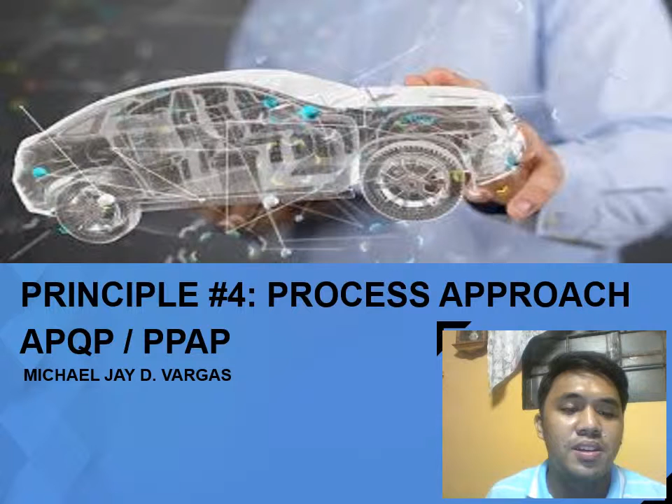Hi, I'm Michael Jay Vargas, and I will discuss with you principle number 4 for process approach, which is APQP and the PPAP. So, giving you the APQP background, a major objective of APQP is to provide a vehicle for suppliers and customers to work together when developing a new product.

APQP was introduced in 1994 by the AIAG, or Automotive Industry Action Group. Before then, the requirements of OEMs in the automotive sector were at times confusing and conflicting. APQP provided a common platform for planning, developing, and producing a product or providing a service.

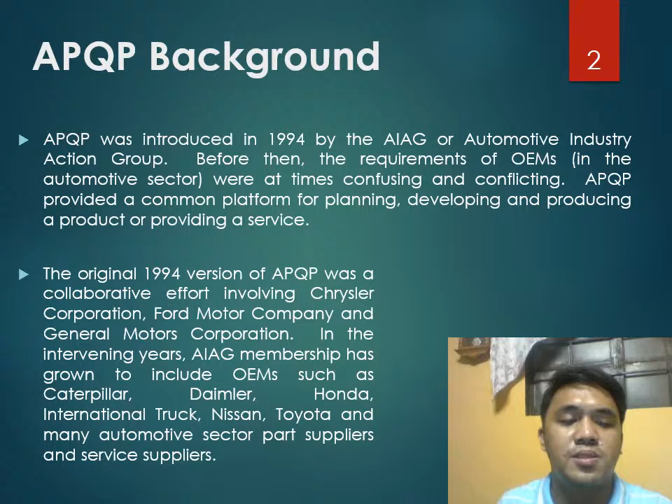The original 1994 version of APQP was a collaborative effort involving Chrysler Corporation, Ford Motor Company, and General Motors Corporation. In the intervening years, AIAG membership has grown to include OEMs such as Caterpillar, Daimler, Honda, International Truck, Nissan, Toyota, and many automotive sector part suppliers and service suppliers.

So what is APQP? It is Advanced Product Quality Planning, or APQP for short. It creates a roadmap for developing new products, complete with time-based milestones and decision points along the way. A comprehensive APQP helps assure that the product is delivered on time and with the highest added value. New product introductions have a greater success rate when the principles of the APQP approach are followed.

The goal of APQP is to facilitate communication with everyone and to assure that all required steps are completed on time. APQP 5-phase process. So basically these are the 5 phases. Number 1 is the plan and define program.

Planning activities include gathering necessary data to define what the customer wants and then using the information to hash out product characteristics. The quality program needed to create the product as specified can then be defined. It assures that customer needs and expectations are clearly understood.

Number 2 is the product design and development. A very broad, efficient, and effective generation and development of ideas to a process that leads to new products. Number 3, the process design and development. Managing product quality module is designed to ensure that the production engineers have the necessary knowledge and essential skills appropriate to their role to effectively contribute to successful new product launch.

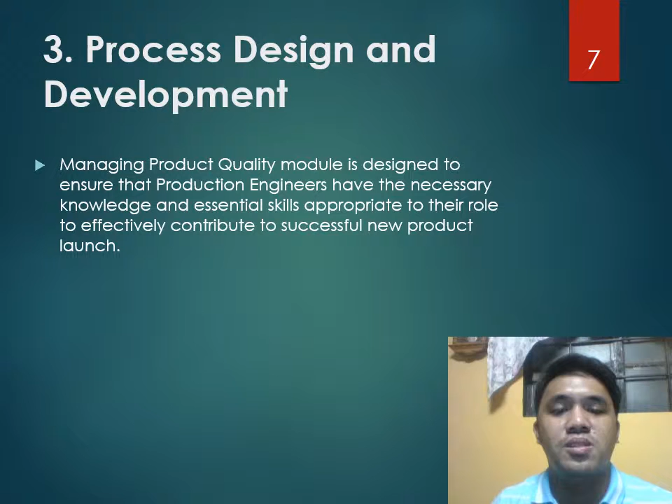Number 4, product and process validation is the analysis of data gathered throughout the design and manufacturing of a product in order to confirm that the process can reliably output products of determined standard. The purpose of process validation is to ensure varied inputs lead to consistent and high quality outputs.

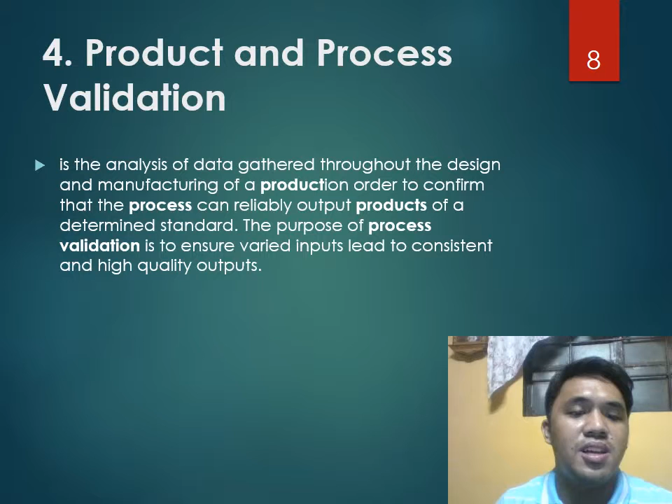Number 5, the feedback, assessment, and corrective actions. The full-scale production launch occurs in this phase, with emphasis on evaluating and improving processes. Mainstays in this phase include reducing process variations, identifying issues and starting corrective actions to support continual improvement, as well as collecting and assessing customer feedback and the data related to process efficiency and quality planning effectiveness. It evaluates outputs and effectiveness of the product quality planning efforts.

So the APQP process involves these major elements. Understand customer needs. This is done by using voice of the customer techniques to determine customer needs and using quality function deployment to organize those needs and translate them into product characteristics or requirements.

Next is the proactive feedback and corrective action. The advanced quality planning process provides feedback from other similar projects with the objective of developing countermeasures on the current project. Other mechanisms such as verification and validation, design reviews, analysis of customer feedback, and warranty data also satisfy this objective.

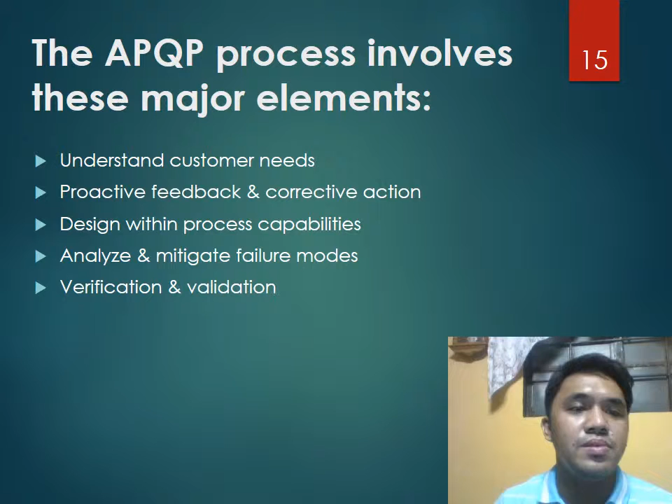Design reviews. Design reviews are formal reviews conducted during the development of a product to assure that the requirements, concept, product, or process satisfies the requirements of the stage of the development, the issues are understood, the risks are being managed, and there is a good business case for development. Control special or critical characteristics. Special or critical characteristics are identified through quality function deployment or other similar structured method. Once these characteristics are understood and there is assessment that the process is capable of meeting these characteristics and their tolerances, the process must be controlled.

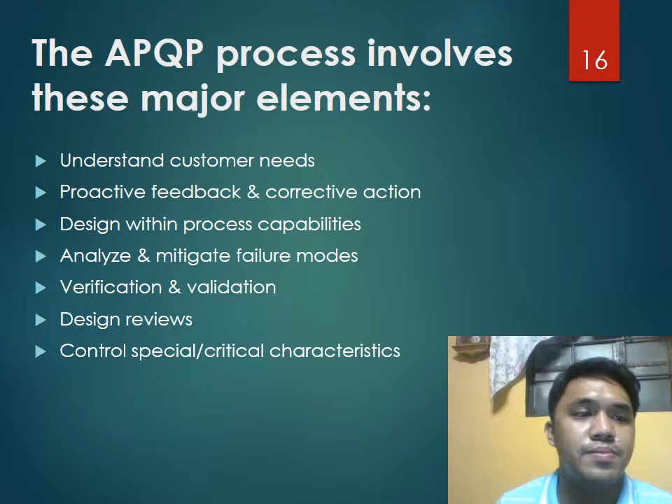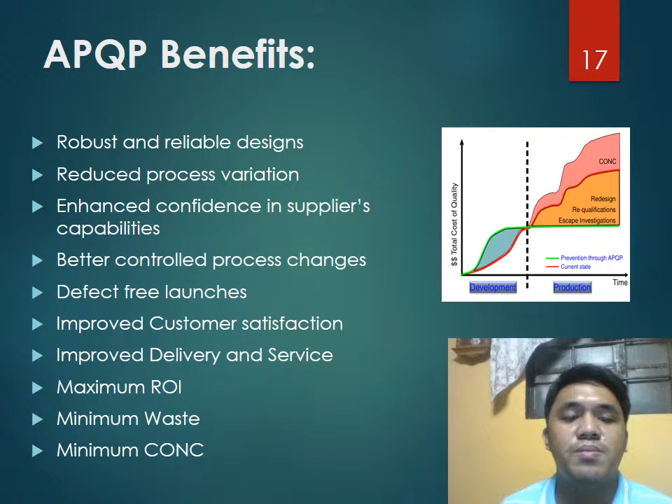APQP benefits: robust and reliable designs, reduce process variation, enhance confidence in suppliers' capabilities, better control process changes, defect-free launches. It improves customer satisfaction, improves delivery and service, maximum ROI, minimum waste, and minimum CONC. So let's proceed to Production Part Approval Process, or PPAP.

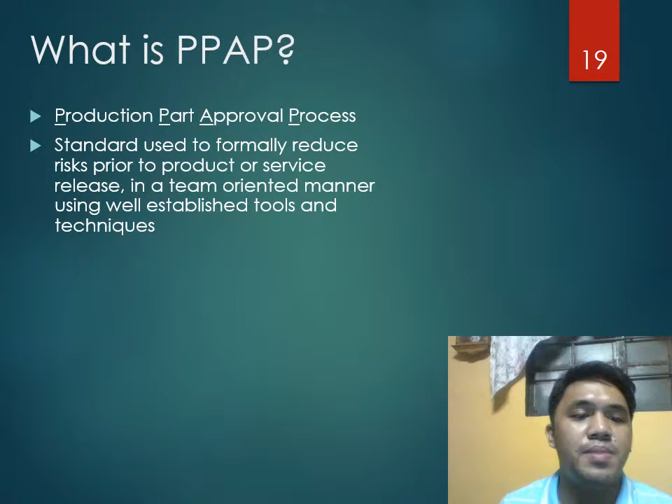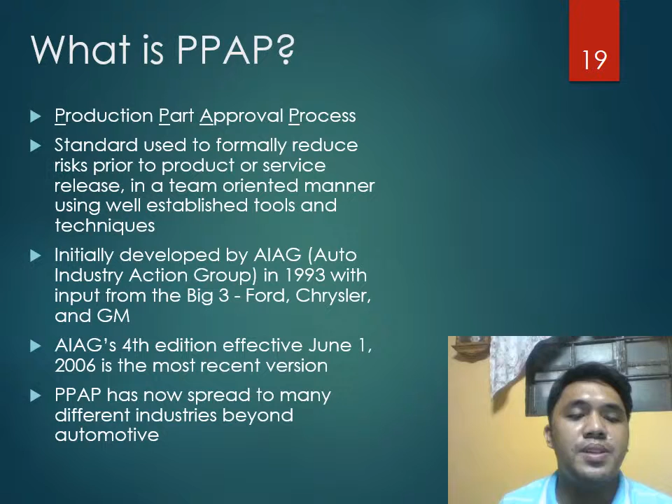What is PPAP? It is Production Part Approval Process, a standard used to formally reduce risk prior to product or service release in a team-oriented manner using well-established tools and techniques. Initially developed by AIAG, Automotive Industry Action Group, in 1993 with input from the Big Three: Ford, Chrysler, and GM. AIAG's 4th edition, effective June 1, 2006, is the most recent version. PPAP has now spread to many different industries beyond automotive.

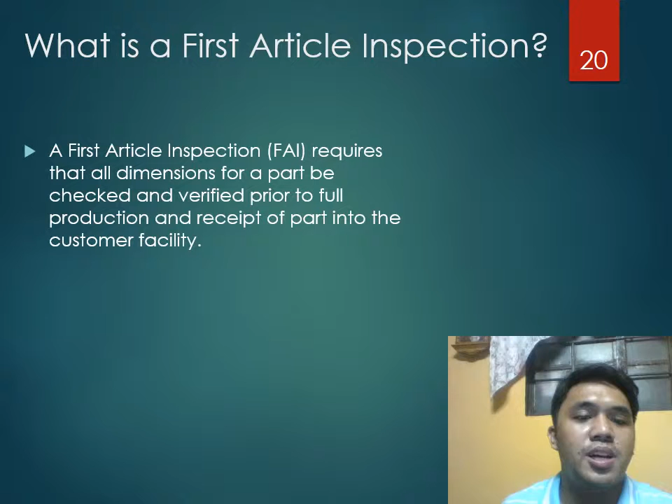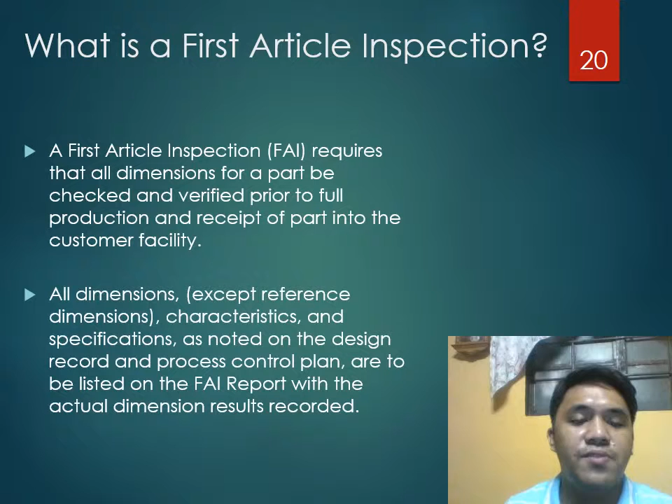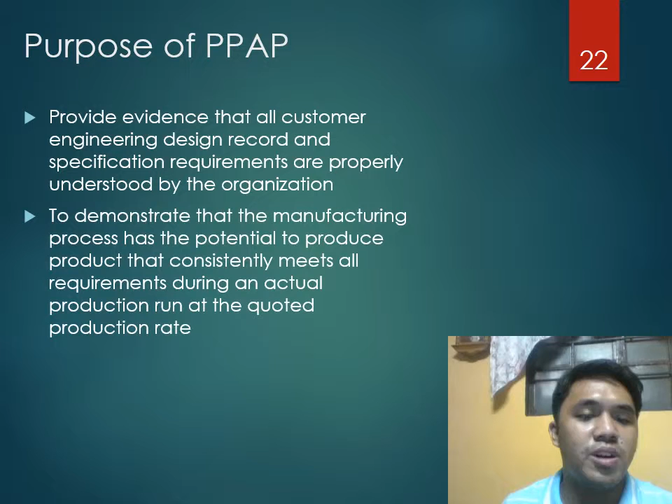Purpose of PPAP. It provides evidence that all customer engineering design record and specification requirements are properly understood by the organization. To demonstrate that the manufacturing process has the potential to produce product that consistently meets all requirements during an actual production run at the quoted production rate.

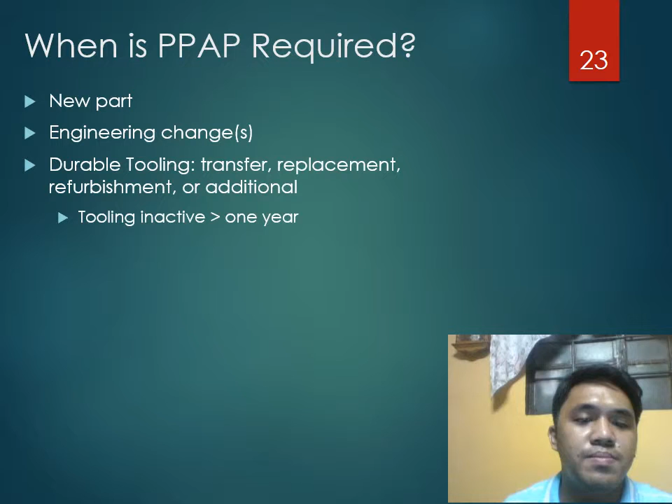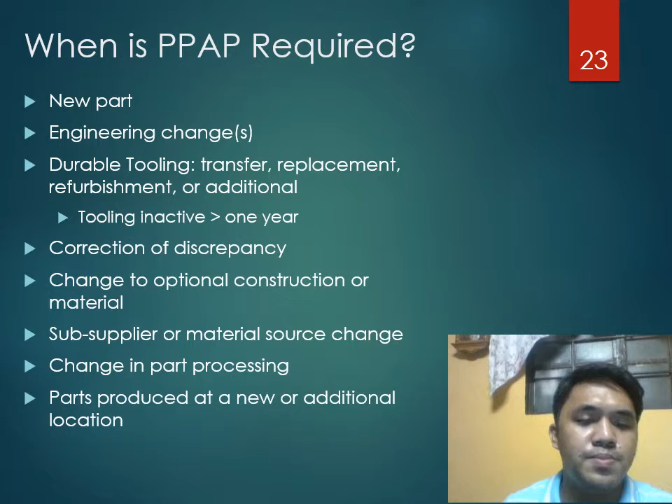So when is the PPAP required? New part. For engineering changes. For durable tooling transfer, replacement, refurbishment, or additional. Tooling inactive more than 1 year. Correction of discrepancy. Change to optional construction or material. Sub-supplier or material source change. Change in part processing. Parts produced at a new or additional location. So PPAP is required with any significant change to product or process.